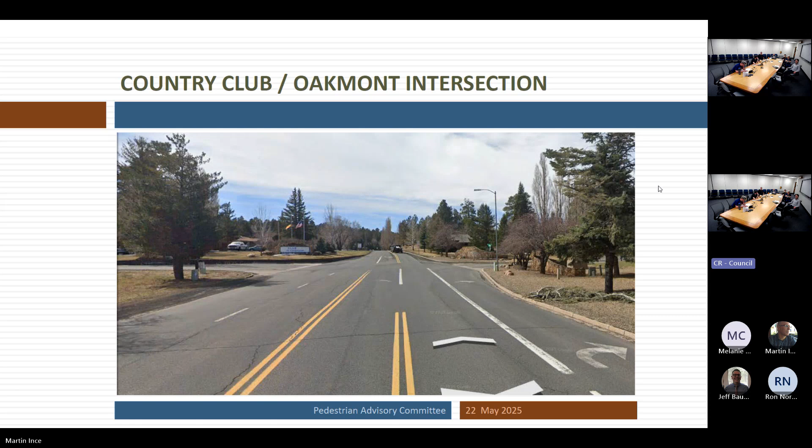This project started way before my time here at the city, sometime in 2000. Again, the issues are sight alignment - horizontal and vertical sight issues. Currently it's two-way stop control, with Country Club running free north and south. We also wanted to touch on the section now and in the future.

So alternatives that our design firm WSP looked at were keeping everything flowing like it is, except improving line of sight through cuts and repaving. We also had to look at a mini roundabout, and then see if four-way stop control would be warranted. Chris Phair was able to put his magic into the 2045 regional plan and look at some of the modeling. At the end of the day, the direction we liked was the roundabout, and I think the next slide has a drawing of that.

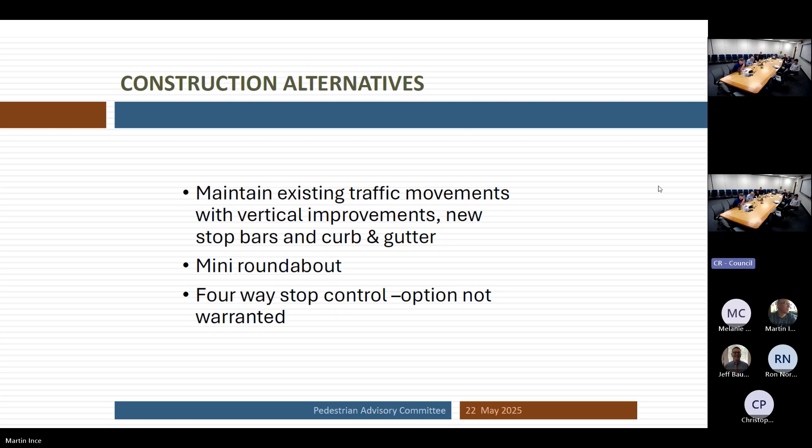Again, this is just conceptual at this time, but it gives you a feel. In town we've got one roundabout classified as a mini roundabout, and that's on Arrowhead and West. That one is about a 70-foot diameter.

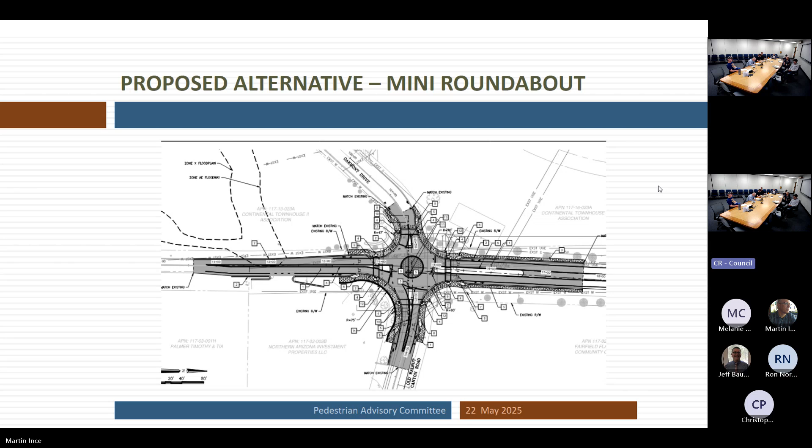For comparison, just to get a feel for the scale, let's pull these up on Google Earth and cruise around. This is our one true mini roundabout in town, at Arrowhead and West, showing the size and scale of the mini roundabout.

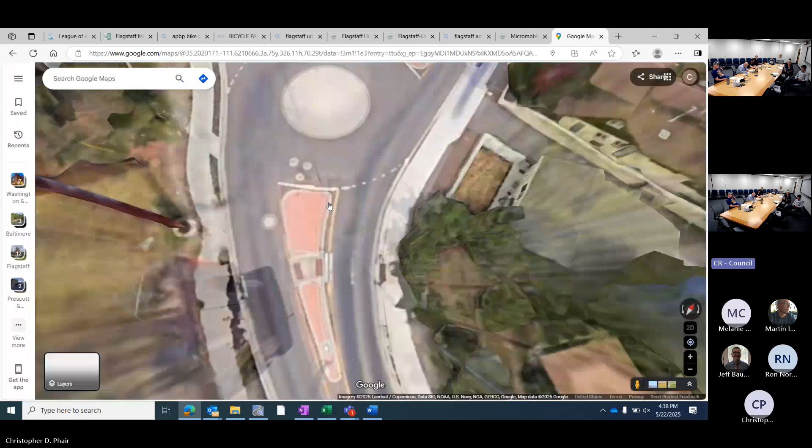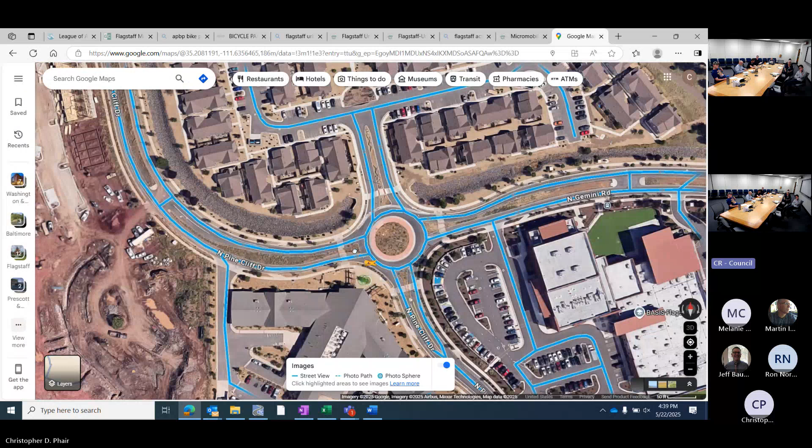Gemini and Pine Cliff is a step up from the mini roundabout, and it's 130 feet across. That's this one here — probably a little closer comparison since it has the four-way intersection, as opposed to the smaller Arrowhead and West.

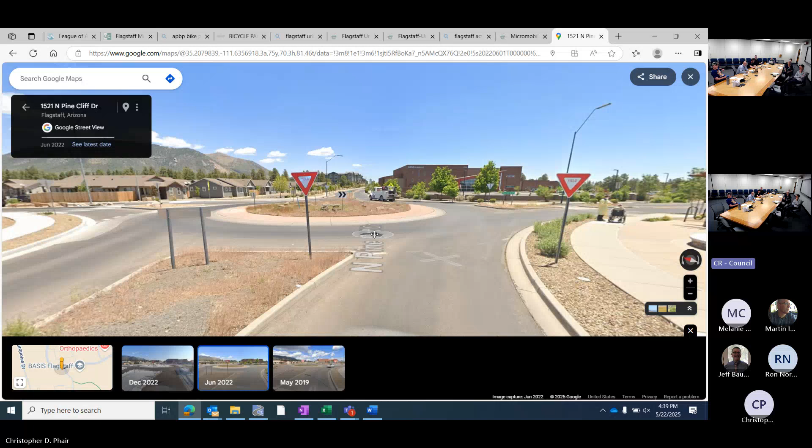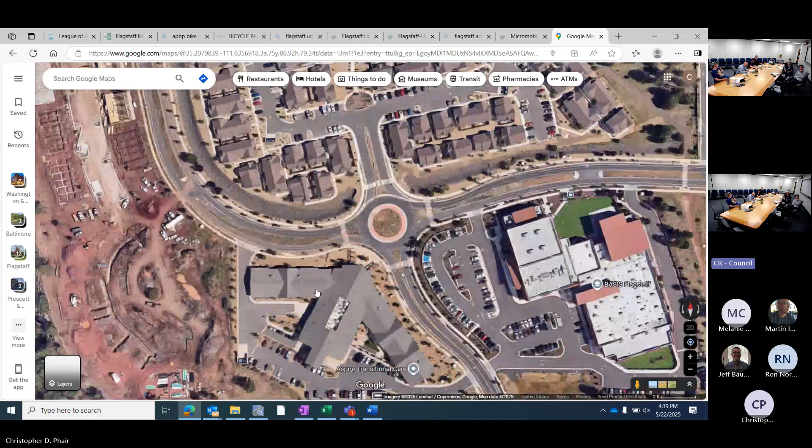Gosh, just a month or so ago it snowed — a little bit of context there. And then the other roundabout that isn't a standard size is Beulah and JWP, which they just finished at the edge of town. So those would be three good comparisons.

Is that the one Jeff pointed out specifically? I think they're both the same — is that the one? Why did they change that — just for semi-traffic, or for the roundabout, or for the bridge? Did they change the size for the roundabout? That's a great question, and I'm not sure. I don't think there used to be a roundabout there — I think it's new construction. I live in Kachina, so I should know, I've been driving by there for 25 years. Or was it right before this, right before Fort Tuthill?

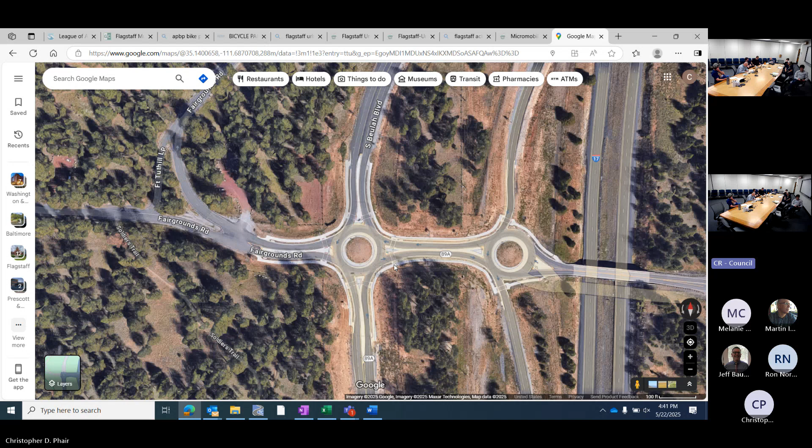Just for comparison, what about the one on Switzer — how big is that one comparatively? I'd have to get my tools out and take a look to give you a definitive answer. It's got four directions — three, but now you've got that new neighborhood feeding into it too. Weird.

Now that one was redone because I know they did the original roundabout and it wasn't scaled big enough, and then - dating myself here - they had to create a whole second lane for turquoise.

That works out, actually, that seems like it works pretty good as a sales route. I use that all the time. Also for pedestrians - yeah, it does suck for pedestrians. It's like Sedona, we need the Sedona ones for scale too.

So is that bigger, or is that about the size of what? You know, I hate to hazard a guess without getting a scale out and looking at it.

I don't believe that the Country Club Oakmont configuration has any of these separate lanes, like the right median turn lane. This is almost like a two-lane in one part. Are there any of the approaches that are similar in design?

What we have right now is just our 15% concept, so that's just - we know what'll fit in that space, and it can definitely change from here.

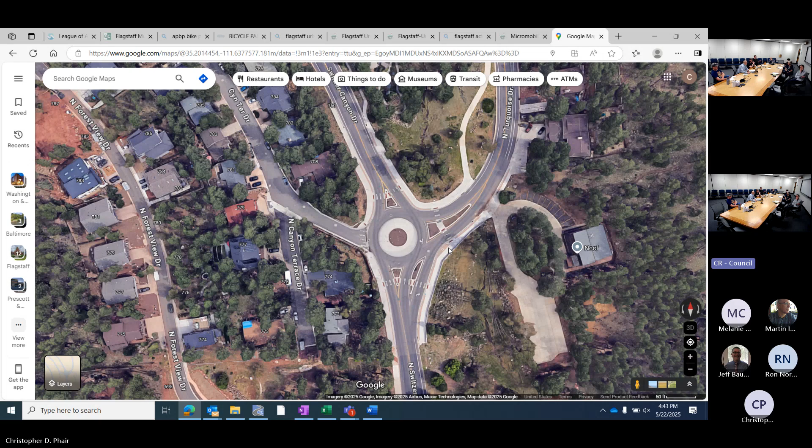Is it very similar sidewalk patterns to all? Well, that's a great question, and that's why we're here. This committee, and last week, is to talk about FUTS connectivity, putting in ADA crosswalks, and just making that a much better intersection.

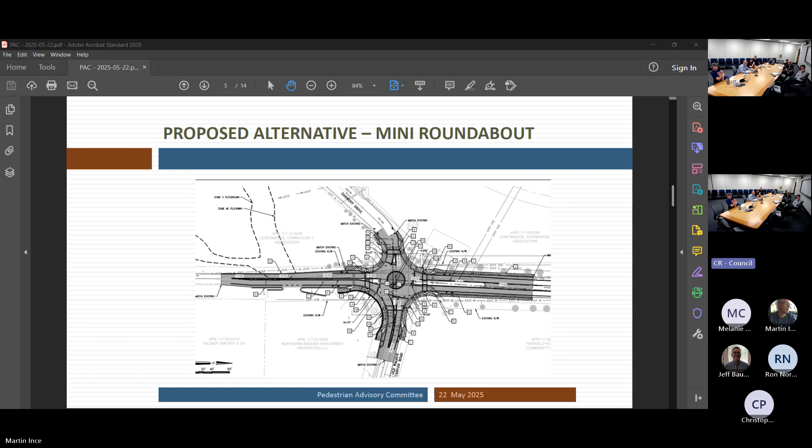I don't know if that can be blown up at all, but again, this is just in its infancy - you can see that we do have some medians in the middle, the crosswalks, and so on and so forth.

I think this would definitely need consideration - there's a lot of truck traffic through there, so it will need to be sized so that commercial traffic isn't necked down too bad. That's one little worry when you turn onto Oakmont - it looks like it sort of squishes down, almost bottlenecks a little bit there.

Maybe it's just an illusion. Yeah, it is weird - when you look at the easement maps, they're just all kind of cobbled together through the years. There's definitely some stuff to vet out, and it is a blind spot, and a lot of school buses go down there too.

All right, Chris, can you refresh my memory on the plan for that giant gap in the sidewalk, coming along the golf course, out along the driving range?

Between the existing Country Club FUTS Trail and - oh, that's coming up, okay, that's part of this, it's just on the next slide. Okay, great, a visual to talk about - tie it all in. Yes.

Where is the center island an actual island unlike the first one we saw - like you can't just drive over it? So we just don't know at this point whether it's mounded, whether it has some riprap in it like the one at JWP they put in, or whether it could be a beautification function in the middle. We're just too early to know.

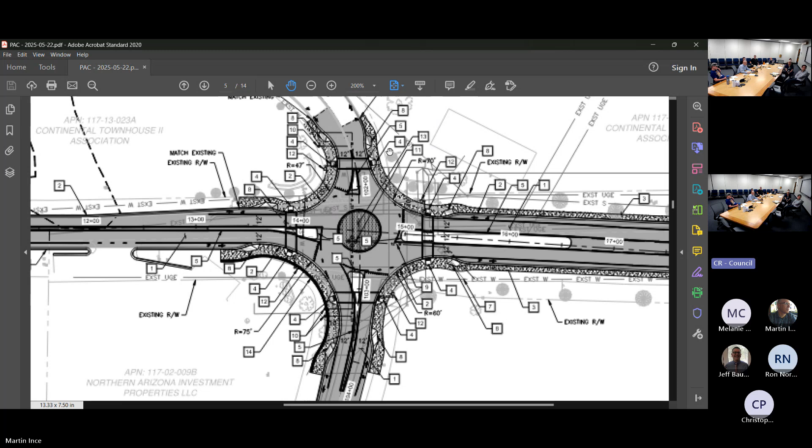Okay, good questions. Chris, if you want to go to, or Martin please, on that final slide - it just shows kind of where our FUTS Trail is currently and what's proposed, so the gap.

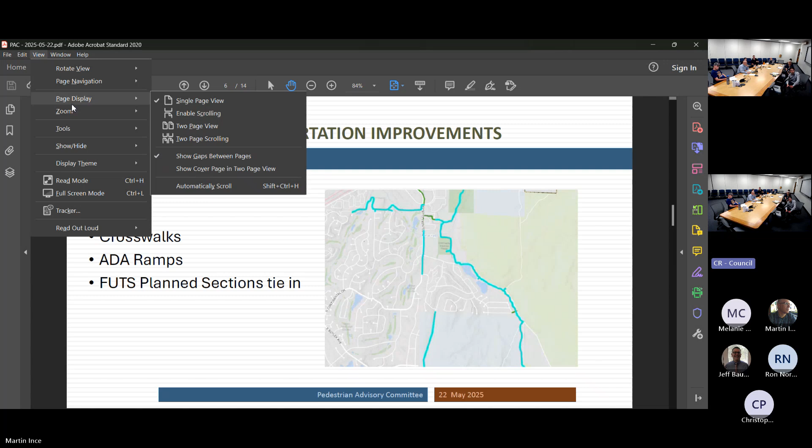Matt, the gap that you were just asking about, you can see that right about there - and I'll let Chris or Martin speak to it, they have much more history in the FUTS Trail and how it got to where it's at, but I believe the southern line is just right about at the gym.

Is that at the country club? Near FAC, yeah, FAC. It's kind of tough to tell on this graphic, but the green line is existing FUTS Trail, and it kind of gets blurred by text over it. And then the light blue line, that's proposed or planned FUTS Trail.

Oh, nice. Yeah, so the idea would be to extend the Country Club FUTS Trail from its current southern end to the south through this intersection.

Yeah, and then there's still some at Bear Paw and in the southern leg, it's so crazy there. There's still not a clear path forward, but I think this northern connectivity from the intersection can easily be tied in. Would that be part of this project, or would that be separate? The construction limits will be kind of what we see on the plans, but we would at least be stubbing out and creating connection points, setting up for future connections.

All right, and so that is Country Club Oakmont, and we are working with WSP to get design focused on the mini roundabout and getting it moving forward. Construction has been pushed back another year, so it won't be till '27 till we're getting equipment on the ground. So, unfortunately, not coming right up.

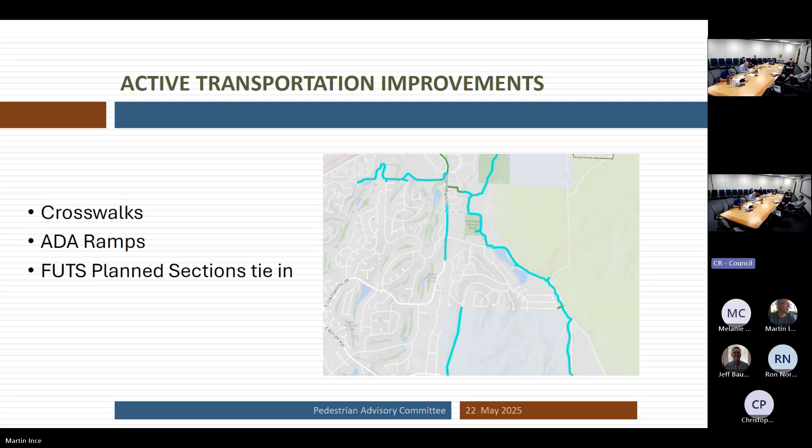Right now it's state land. I don't know what the status of it is as state land. I think, Martin, did we hear something about it going to auction in the near term? Yeah, that's a rumor. So it could be an area that gets developed towards being a future residential area.

Of course, that could impact the intersection we're talking about. Once that whole area is built out, it's gonna bring a lot more traffic there. One of my responsibilities with the city is to run the transportation demand model, and ultimately we can simulate network changes, roadway alignments, configurations, and changes and shifts in land use around the city.

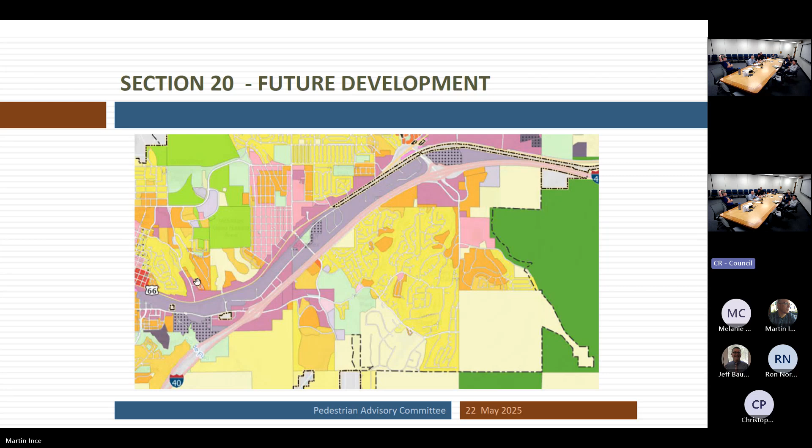Biking and driving this because Sprouts and the grocery store is up. Sorry, it's Osborne and Miller, right next to the stadium.

Thought it was like the best designed roundabout just because the sides all had buttons and the island had buttons. So even if you're old or got in an accident or injured, and got to that island with a rush of traffic, you could still push the button. My only request is that if it's a used intersection and you want future expansion, make it as safe as possible. In the scheme of development, buttons and flashers are cheap.

Yeah, we do have an electrical piece in the future design for lighting, and that would fall in. If you type in East Osborne and Miller.

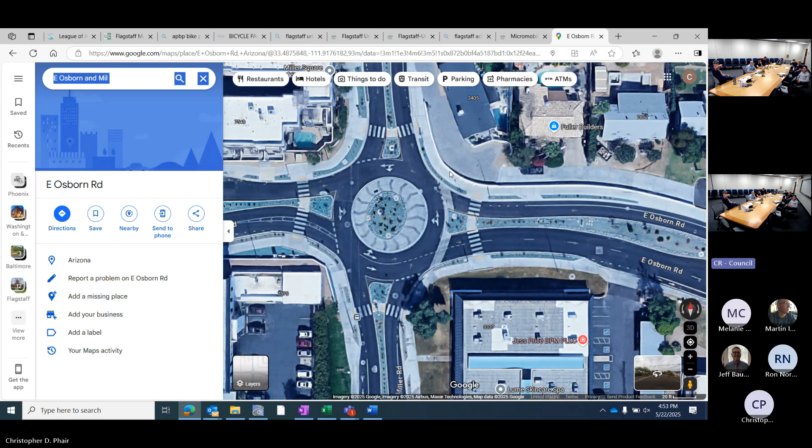It's kind of like what I wish Sedona would have, because those are so scary as a pedestrian. But I thought interacting with this as a driver, as a cyclist, and as a pedestrian, because we walked this, was great. As safe as it could be, in my mind.

Visibility, buttons, lights. The flashing lights, amber or red? They were the bright yellow. So the amber is just like... I like the one they have at NAU on Milton. Yeah, those are real quick.

So you said there's electrical in the design. Is that getting at the beacons that Jay's talking about? Well, again, at this level, we're not there. We did have them capture electrical for dark sky lighting as a potential, which I'm just saying would also lend itself to that. Yeah, I mean, could that be in the notes though? Just like, why wouldn't it, if it can be safer, why not put maximum effort into that? Like if we're gonna build it, if it's going to be built, it should be the safest thing for cyclists and pedestrians.

It's new, we're 2026, 2027. Flagstaff says they love pedestrians and biking and hiking, that should be visual. Really good feedback, I appreciate it.

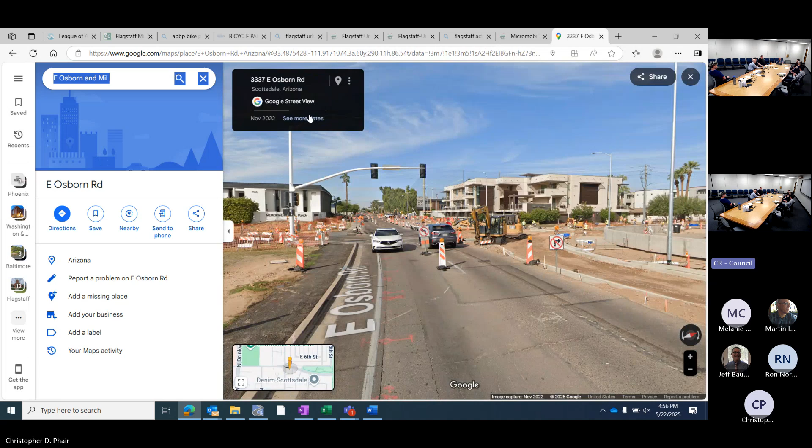All these places that claim to be pedestrian hiking. So what is the shortcoming that you guys are pointing out in Sedona? It's just there's not beacons or there's no median. It's just kind of like run out when you can, and it's constant traffic. Bikes, and there's no pedestrian walkway, not really factored in when they built those. No, it was like a traffic slowing measure, it seems like, more than anything else.

Okay, you need to make eye contact. Even making eye contact doesn't always guarantee that it's okay. Yeah, people rush through there, they're like, oh man.

I think, just to add to that conversation, I think a couple of new roundabouts the city has under consideration, a bigger one at Butler and Fourth, and the one that just started construction at Cedar, Lockett and Fourth, will both have push buttons and either amber flashing or red flashing lights. There's a difference, of course. Amber flashing is just like a visual beacon to indicate to people that there are pedestrians crossing, need to yield to pedestrians. A flashing red light, of course, means you have to come to a stop. So they're kind of two different things. I think in both cases, they're required as part of PROWAG.

I'll ask Jeff to jump in if I get this wrong, but the requirement for those things, and I'm guessing it's the same in the Scottsdale one, is a requirement of the new public rights of way accessibility guidelines to provide better access and accessibility through roundabouts. I don't know if there's a size limit on when they're applicable, or if that's just a new requirement.

I think two of the options are flashing beacons, red or amber, and the third is raised crosswalks in the intersection. Beacons would be better than raised, just a hey-stop signal. Think if you were in a wheelchair or an accessible bike, ADA, you're low to the ground, sitting back on your recumbent. You pretty much have to risk it for a car to see you, essentially, whether it's raised or not. But both would be better.

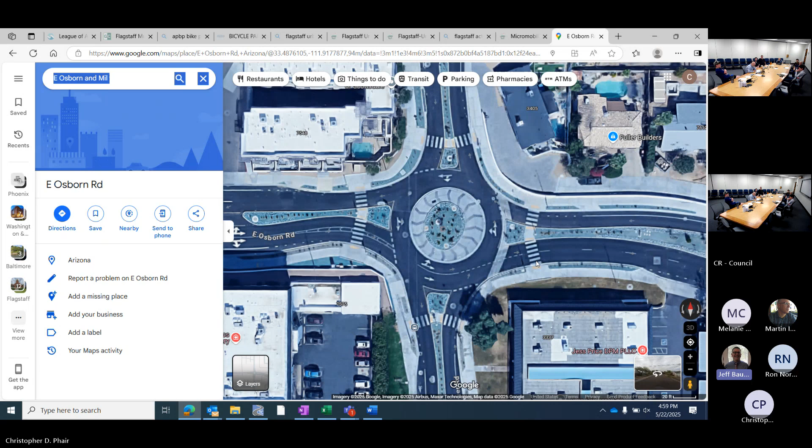One of the things with these mini roundabouts is they fit in such a small space that a lot of things need to be traversable. So trucks need to be able to run over the middle island a little bit, potentially even the splitter islands to get through. That's how you keep the size so small, by making a lot of things traversable. And traversable things don't work terribly well with push buttons and poles, so we'll just have to work out the balance as we go through that. But I believe PROWAG is multi-lane approaches and exits is when beacons are recommended.

Thanks for that clarification. Sure. Any other comments or discussion about this one? We'll be looking forward to seeing it on the agenda again soon-ish. Good deal. Thanks for coming, guys, really appreciate your time.

All right, moving on to old business. Mode share.

Yeah, there's nothing new there, so I don't have much to share. We've been spending a little time updating the city's mode share report. Can you find that on the website? Maybe we just go through that. Prior to, as part of the preparation for the active transportation master plan, we did an in-depth analysis of mode share and mode share trends in Flagstaff. Mode share is simply what percentage of trips are made by vehicles, walking, biking, and transit, the big categories.

And in vehicles, you can break that down further into single occupancy vehicles and multi-occupancy. Multi-occupancy is just like carpooling, where you have multiple people in the vehicle. I think at some point in the near future the other category is going to be scooters and other mobility devices, because that's already probably a significant component that I'm not sure where it's getting captured. I'm guessing walking is part of the walking share.

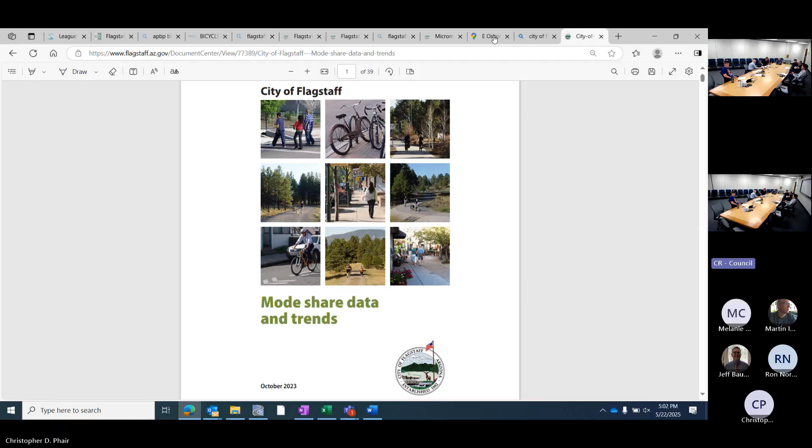I wanted to check, I think that might be a record. It's gotta be, I've seen it. We go back to that. Sorry.

So actually, there's more items on the reports because we wanted to give you an update on some of the projects we're working on, in a little bit more detail. I know we've talked about a lot of these things, but we're starting to work on some. We're at the very beginning of a lot of them, but it feels like starting work on these things is progress that will result in them actually getting built.

So the first one is part of the First Mile, Last Mile project. First Mile, Last Mile is a grant that was obtained by Mountain Line to provide better pedestrian and bike access to transit. We have a handful of sidewalks, crossings, and bikeways that we've identified. The first project that's going to get started in a couple of weeks, probably by the middle of June, is the sidewalks on Huntington.

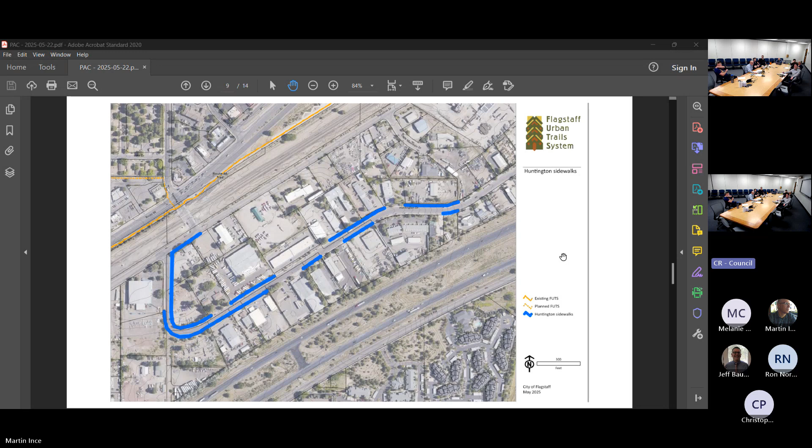A few people have asked me about that connection because what's being built there looks really narrow. So we went out and looked at it, and it will fit this section. I don't have the original dimensions, but it's probably 20 some feet of pavement. So we have curb and gutter on both sides, a 4.5 foot bike lane, and an 11-foot travel lane, which is pretty standard around town for our dimensions, and then a 5-foot sidewalk on the inside.

But when you look at an 11-foot travel lane and a 4.5 foot bike lane just by themselves, that seems really, really narrow. I think it's kind of an optical illusion—if you had the rest of the roadway next to it, it would look like there's a lot of asphalt. Not everyone is comfortable even in a 4.5 foot bike lane next to an 11-foot travel lane.

In any case, depending on speed and volume of traffic, it provides space for a lot of cyclists. I think people use the unofficial gravel path now. If you were a cyclist uncomfortable being in the lane, there's a sidewalk there for you. You should hop on that anyway.

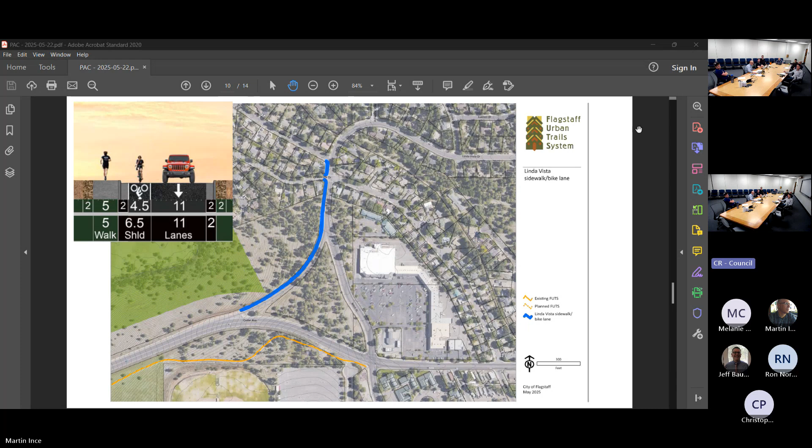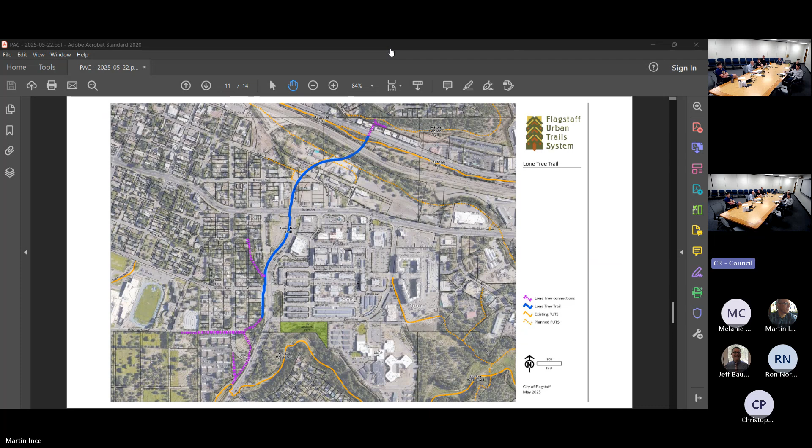Do you mind? I'm going to switch this — that pop-up is kind of annoying. Let me go to the original PowerPoint. I knew this was a problem before, but I thought we used the PDF and that turned out better than the PowerPoint. It's the PowerPoint that we use.

Okay, thanks for indulging me.

So here's the Lone Tree Overpass, goes over the railroad tracks, tees into Route 66. This is the existing Route 66 path — it will go under Lone Tree and continue, but there'll be a button hook that comes back up so you can get up to Lone Tree.

There will be a signalized intersection here, and an opportunity to connect from the end of that trail up to the trail at Switzer Canyon, which I think is a different report. There's a good bit of topography to overcome — I think probably 20 feet of a red sandstone cut slope.

It could be a switchback, or it could just be a straight connection. But having that connection when this bridge is in place seems pretty compelling. This will take you all the way up to Buffalo Park if you follow it around. Even coming down Route 66, you'd be able to get on Lone Tree, going under and back up to the button hook, then down Lone Tree and onto campus. It seems like a good shortcut for people.

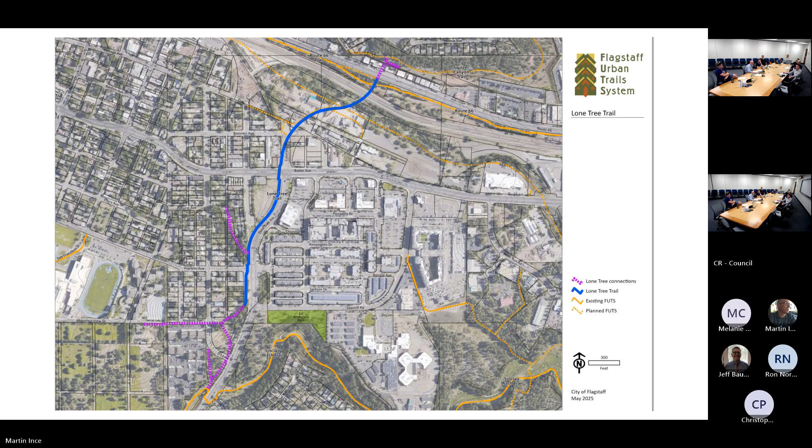You're working south of Butler — what's the latest timeframe for the overpass? I think I've heard like 3 construction seasons. Is that it — a couple of years? So, a big project — yeah, it's a big project. Other questions, comments? We can move on.